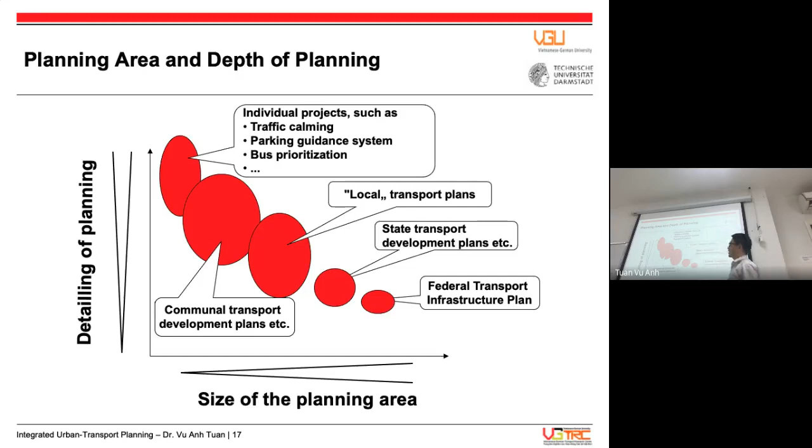And park and ride for people to access the BRT station by bicycle, and it even introduced the flyover or road crossing for pedestrians to access the BRT station, which is located in the middle of the road. So individual projects could include traffic calming, speed reduction measures, parking guidance systems, bus prioritization, BRT introduction, and so on.

So in transport planning, we need to do studies, collect data, analyze, project, and suggest something, especially infrastructure suggestions, policy suggestions, and other suggestions as well. As I explained, for a wider study area, we can have national or provincial transport planning, which focuses on planning for a large jurisdiction implemented by a transport agency, like the Ministry of Transport or the Department of Transport of Ho Chi Minh City. And it is usually at the strategic level.

The planning is made for a long range, usually for the next 20 or 40 years. So we need to look into the future, and how to project the future is really a challenging task. Usually we collect past data, say for the past 10 years: how population is growing, how land use is changing, how vehicles are growing, and we project for the next 10 years. That is projecting a trend. But usually vehicle growth is not linear like this. It's something like a logistic curve.

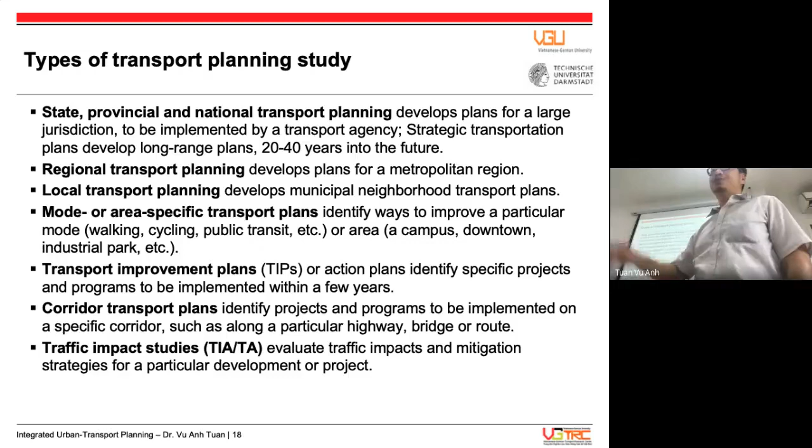Once we have done something, we want to know what is the impact. How much congestion is reduced? How many additional passengers are using the new bus service? How many people are shifting from motorcycle to bus or metro? How many people are engaging in using shared mobility services? We need to do some traffic impact assessment study, evaluating traffic impacts and mitigation strategies for particular developments.

So in this module, you will learn about traffic assessment study in part 5. It's very hectic. Headache.

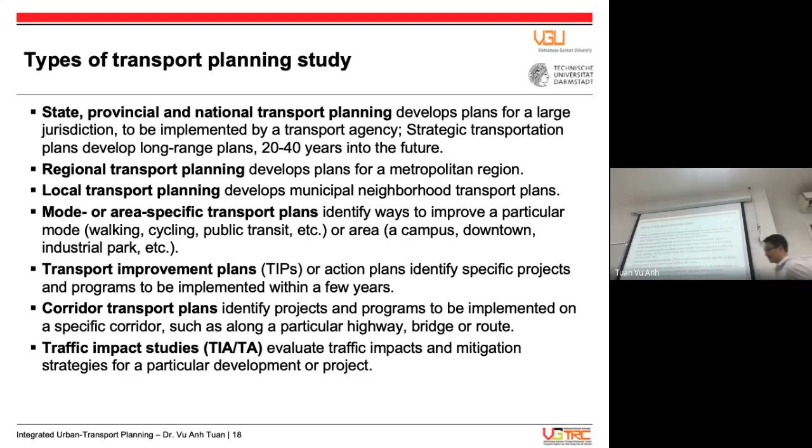So I already explained the concept of transport planning, the characteristics of transport planning, and different studies at different levels. Now I'm talking about conventional transport planning practice, traditional or conventional transport planning. As I mentioned, traditional transport planning is in favor of automobiles.

It always thinks about reducing congestion by widening the road, and pays less attention to public transport, non-motorized transport, and environmental issues. So the key principle of conventional planning is to maximize traffic speed, minimize congestion, and reduce distance-based crash rate. Usually it comes up with road expansion. And of course, in conventional transport planning, the transport planner uses a well-developed set of engineering, modeling, and financing tools.

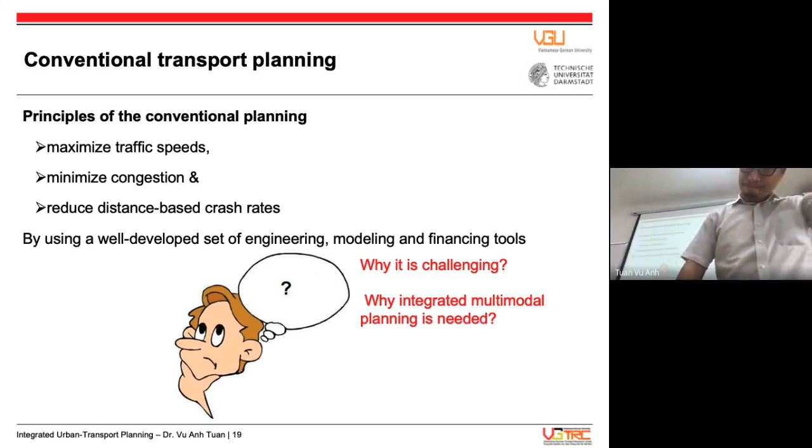So what is the problem with conventional planning practice? As I mentioned, it supports automobile dependency, which refers to transport and land use patterns favoring automobile travel over other transportation options. Usually what they consider is how much financial cost to the government if government is going to build new highway networks, expanding the highway network.

How much vehicle operating cost can be reduced through saving fuel, reducing toll, and reducing tire wear. And how much travel time can be minimized? If a new road is built, the commuting time from home to work may be reduced from 1 hour to 40 minutes. We can aggregate this for the whole population under the study area.

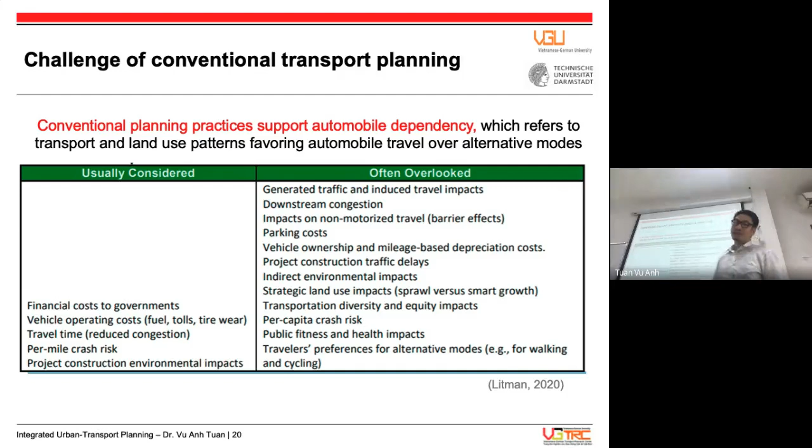But as I mentioned, as long as urbanization is taking place rapidly, congestion becomes more severe, environmental issues become more severe, accidents become more severe, noise becomes more severe, and especially local pollutants like PM 2.5, particulate matter. It's a microfine dust. You never see it, it's clear. It looks clean, but actually it's not clean at all. It's very, very dusty and very dangerous.

Every day you inhale, breathe about 10 to 12 cubic meters of air. And within it, many harmful gases and dust, emitted by cars, by motorcycles, and by other activities like construction.

So we have to solve all these challenges to make sure we move around the city in a safer manner, a greener manner, a reliable manner, and saving energy, and will not sacrifice the needs of our young generation. That means we have to use different options for transportation, not only purely focusing on cars and motorcycles. We need to think about the bus, the metro, bicycle, walking, cycling, and others, and even water bus. Yeah, water bus is also a good means of transport.

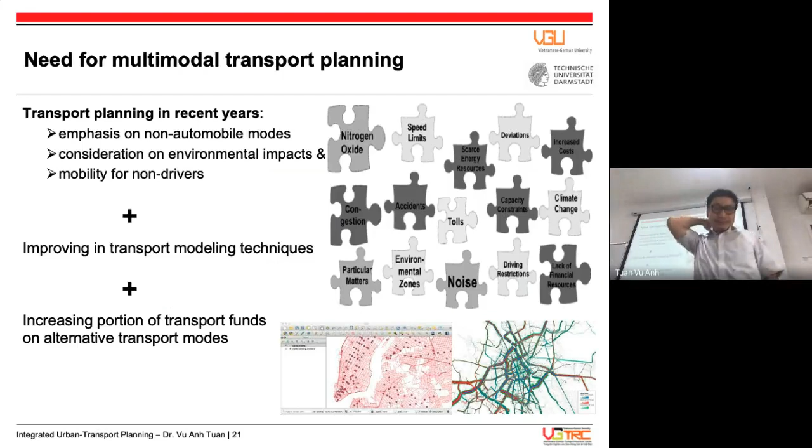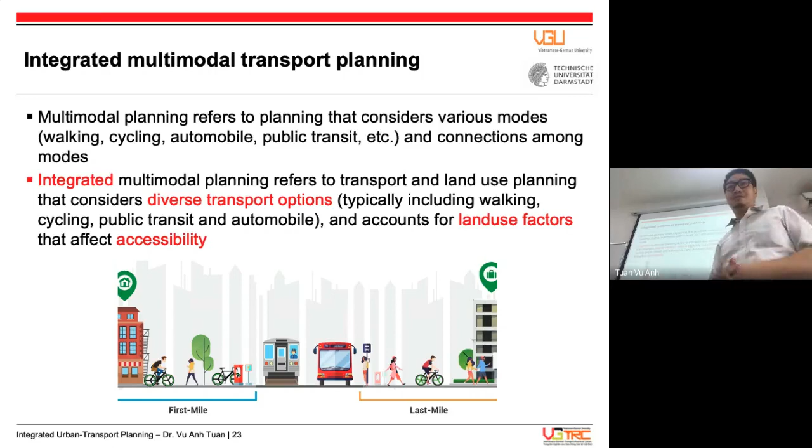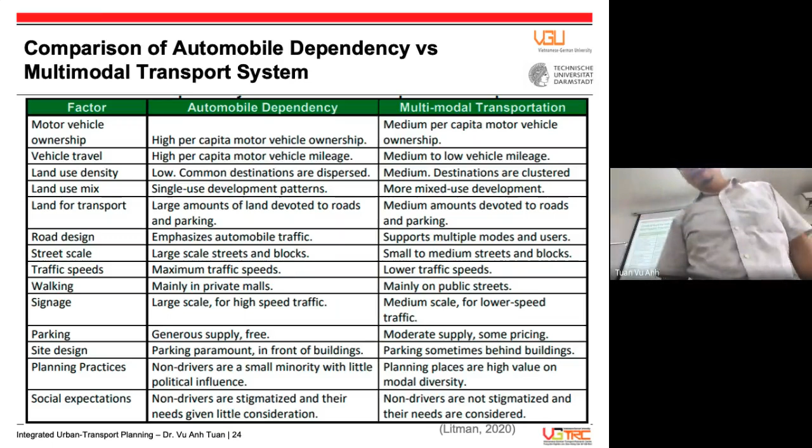What do you think is the benefit of integrating different modes of transport? At first, we can enhance the efficiency of the transport system. Please imagine that we have the existing bus network, but the walking condition is very poor. So the ridership, or the number of passengers, is low because people hesitate to use the bus because walking is so awful. Awful, not awesome, awful.

But once we improve the walking condition and provide park and ride for bicycles, then more and more people use the bus. That means we can increase the efficiency of the existing bus. And people walk more and become stronger, healthier. This one will become smaller. Okay.

Then therefore we can reduce road congestion, we can reduce air pollution, we can improve affordability, affordability for low-income users. Low-income users don't need to spend a lot of money, saving a lot of money to buy a car. They can use transit at a low cost.

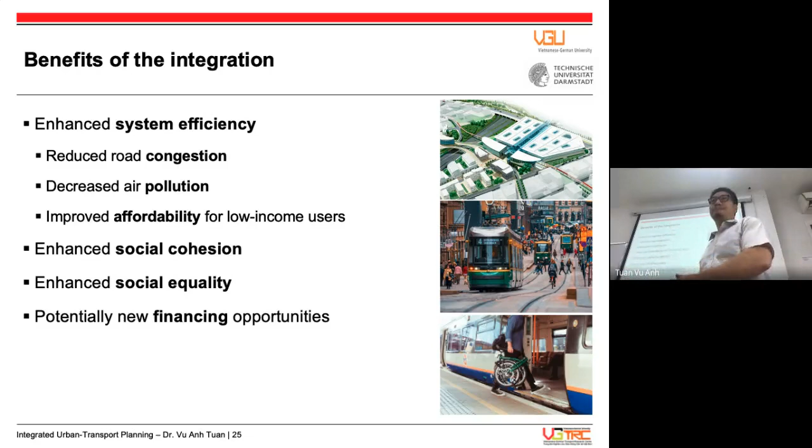Okay. 10 minutes more. 10 minutes more. And then we will have a break and the last session. I think today we can go as long as we can. Yeah? And tomorrow we may shorten our lecture. I think the last part is more interesting to you because it's about TOD, transit-oriented development. It perfectly fits your interest.

Now, what is the mechanism for the integration of different transport systems or modes? We have different layers of integration. At the functional level, it is integration between the transport function and the land use function.

Where we get on the train is also where we can do banking. We can withdraw money. Where we get on the train, we can do shopping because a supermarket is located inside the station. Where we get on the train, we can have a restaurant. We can have dinner with friends, we can have coffee with friends because Starbucks and Highlands Coffee are located there.

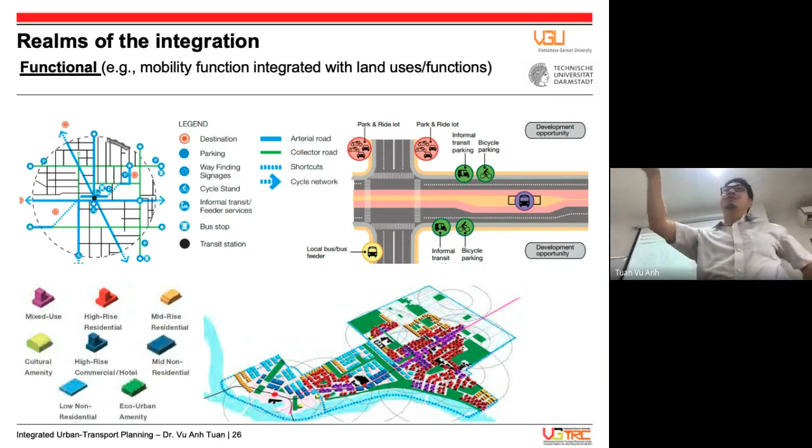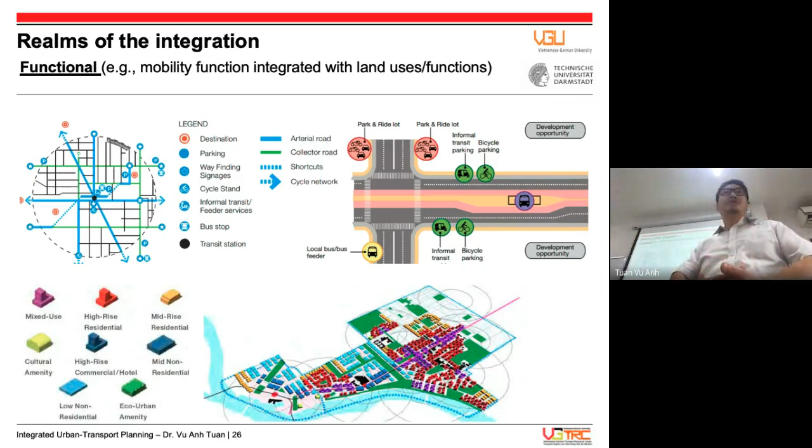And where we get off the train is also where we meet each other for business, for scientific conferences, because some conference hall is located just next to the railway station. That means we mix different functions, the mobility function and the land use function, together at one place, one destination.

Okay, or this is the road, this is the intersection. Here is the bus stop, and here we have the park and ride lot, and here we have the informal transit parking, the bicycle parking, and so on. So that means we can integrate different modes at one place. This is simple, but this is really integration between land use and the mobility function.

This shows the station development area. Here is the station, and after getting off at the station, you can go to housing, to a sports stadium or park and others very quickly and easily.

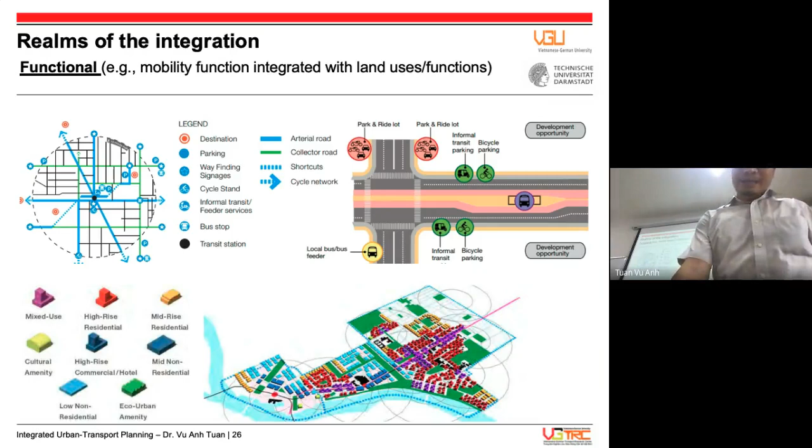Now, after the functional integration, we should have the physical integration. That means network integration. Integration between the bus network and the railway network, integration between the bicycle network and the bus network. So it means hard infrastructure integration, which allows easy access and interchanges between different modes, such as building stations that serve multiple types of transport.

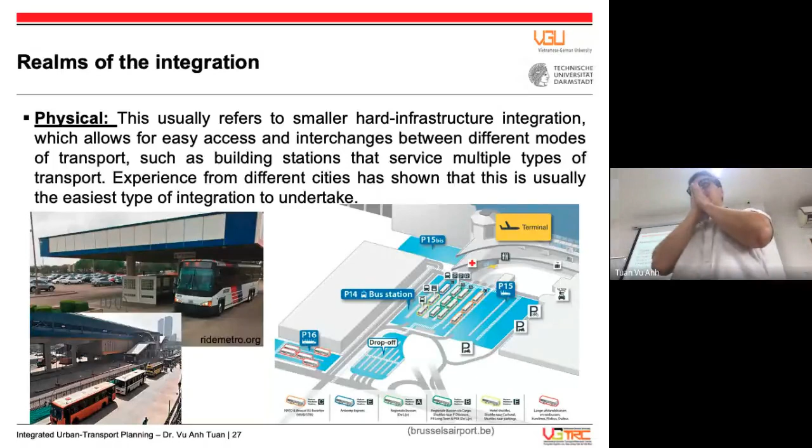Like here, this is an airport. Inside the airport we have the bus station, and we have the car park. So after getting off the airplane and checking out, you can ride a bus home or to the final destination.

And here at the train station, you have the bus stop. That means after getting off the train, you can get on the bus, or after getting off the bus, you can get on the train immediately.

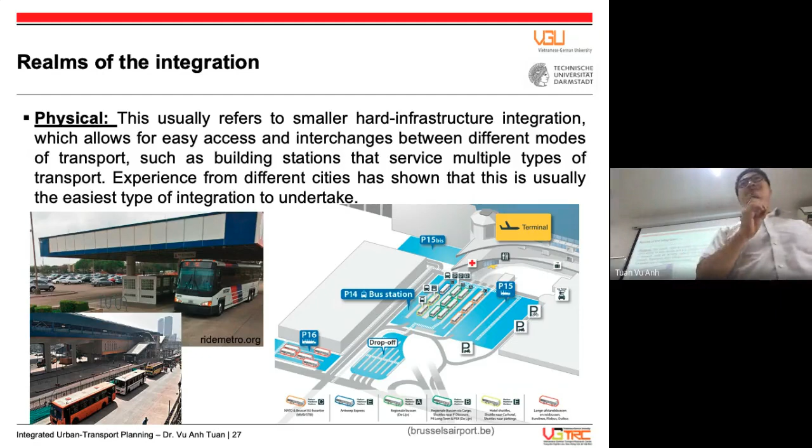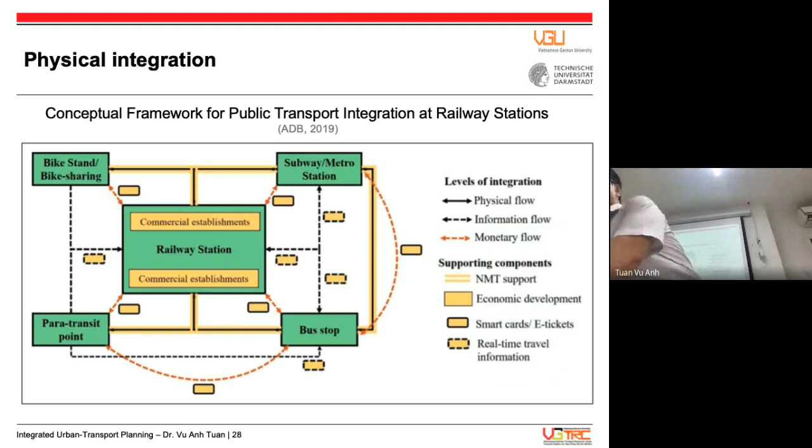And at the four corners of the railway station, we have the bicycle stand, bicycle sharing, we have the subway and metro station just nearby, and the bus stop just in front of the railway station, and we have the paratransit where we can use the jeepney or tricycle or something else. So this is the concept, and this concept is well known and practiced everywhere.

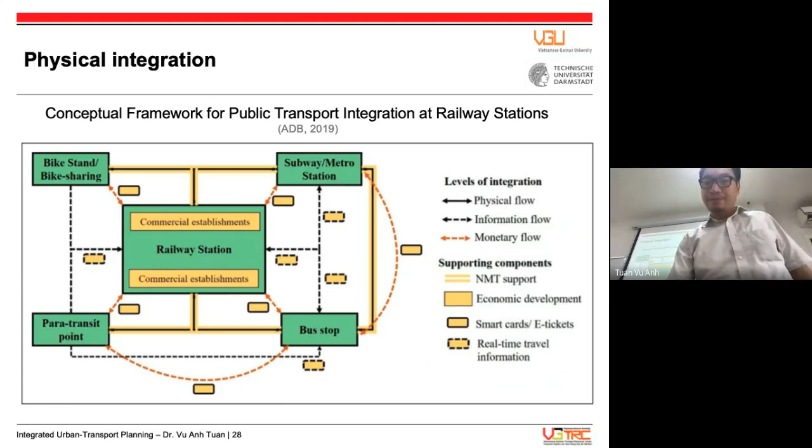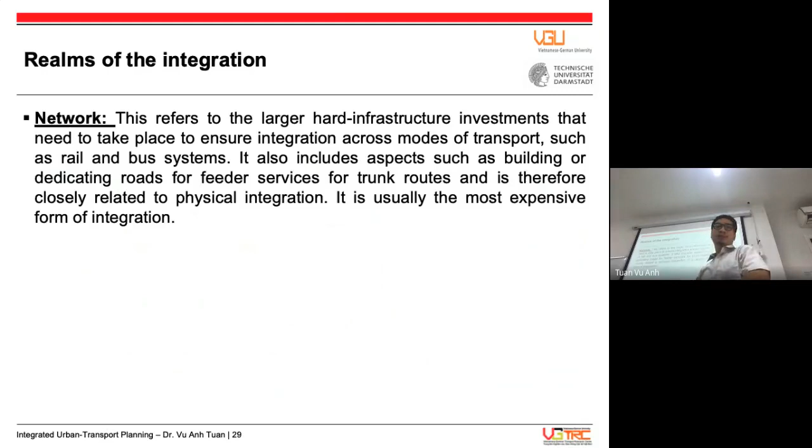And now, not only integration at the node or at the station, but integration in terms of network. Because here is the Darmstadt railway network and tram and buses. So we can see the tram and the railway as a backbone, and the buses are supplying, complementing and making a really dense network.

So it allows people to access the transit station everywhere, just within 200 meters walking. They can get to a bus stop or train station or tram station and so on. That is very convenient.

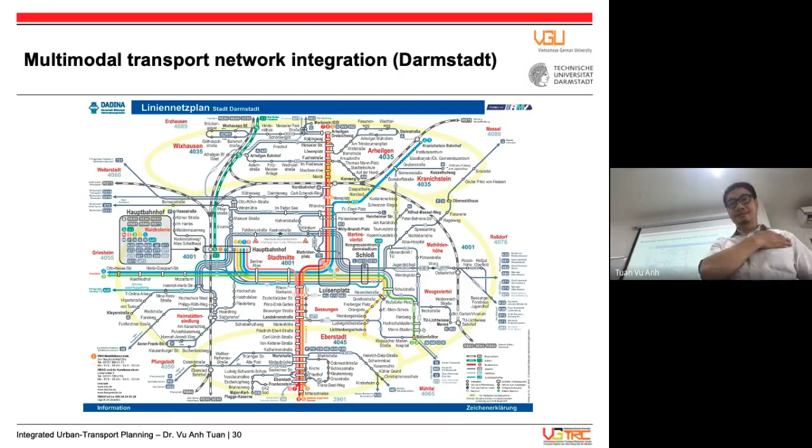Next one. Not only physical integration and network integration, but also operation integration. Operation integration usually refers to integration of the ticketing system, using the same common tickets to use train, bus, tram, or even bicycle sharing and so on. Integration also in terms of the timetable, allowing passengers to transfer from one system to another quicker.

I remember when I stayed in Tokyo, I got off one train and got into another train just within 20 seconds. So this train is arriving, stops, and I get off, and at the other platform just nearby, the other train is already arriving. So I get on the train just within 20 seconds. If it's longer, I may miss the train. So that means the railway operator has to synchronize the timetables of different train lines.

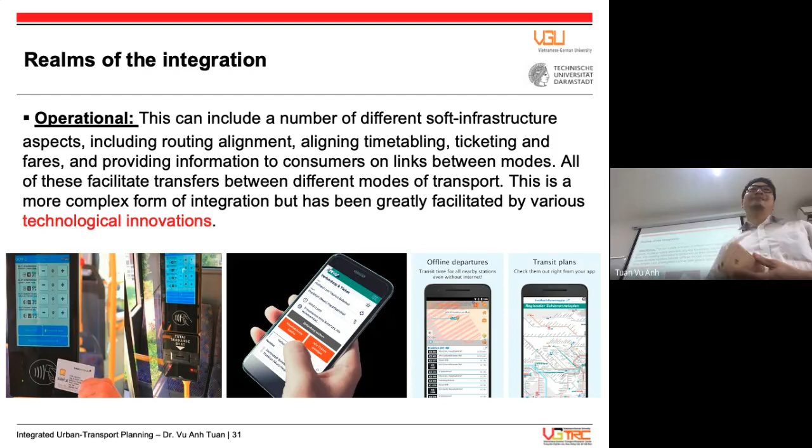And very complicated, a lot of the time, is institutional integration. It may take years and years or never happen. But this is most critical. If the train operator and the bus operator don't shake hands, there is no integration.

If the urban planning and architecture department and the transport department don't shake hands, land use and transport integration never happens. Okay. Whatever the good ideas, if key stakeholders don't work together or don't integrate, then an idea is just an idea.

As I mentioned to you, in terms of planning or any other technical sector, we have different stakeholders in the planning process and even the management process. The national government regulates through law and regulation. Regional and local governments have specific policies, rules and regulations. And public service providers like bus operators, train operators.